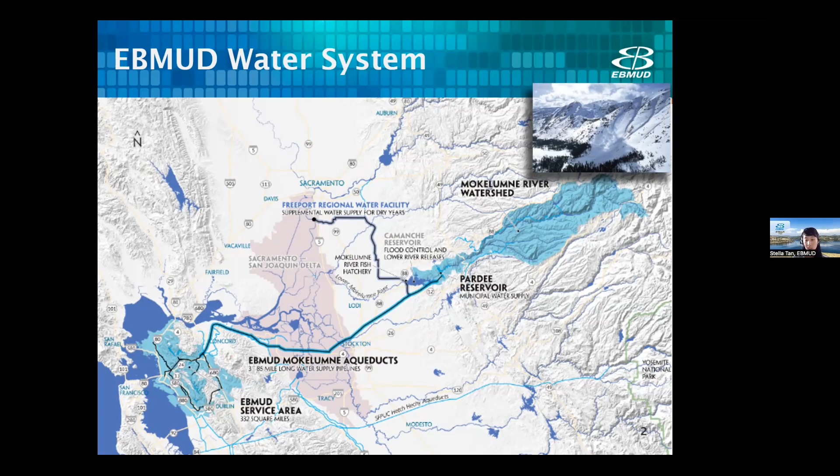The water is stored in the Pardee Reservoir before it travels 85 miles through our pipelines to the EBMUD service area. Our service area has 1.4 million customers in 29 cities in Alameda and Contra Costa counties. We have 6 water treatment plants, and water is distributed through our many reservoirs and pumping plants to our customers through 4,200 miles of pipeline.

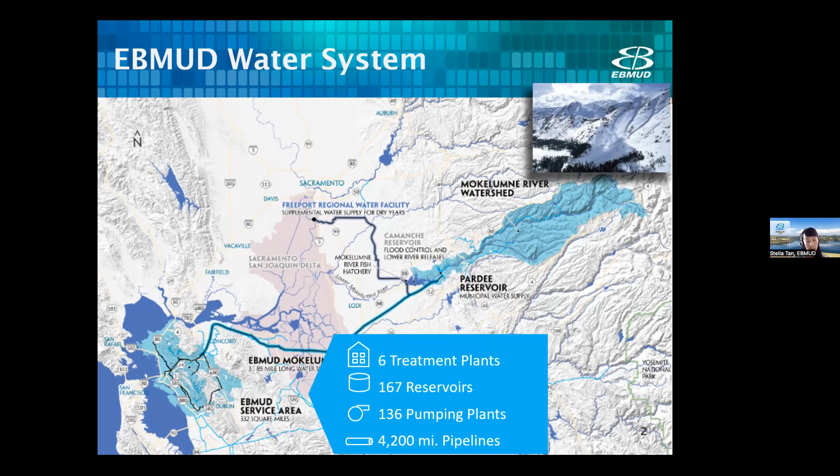This project will take place in one of our 6 water treatment plants, at the Sobrante Water Treatment Plant, as you're all aware. And we plan to increase the Sobrante Water Treatment Plant capacity by constructing new facilities in 2 phases.

The purpose of tonight's meeting is to introduce you to the project, including preliminary site plans and conceptual visual simulations, which we've revised since the March public meeting. We would also like to receive your feedback and concerns.

To provide some context for the project schedule, we're currently in the planning stage, where we're developing the conceptual design and executing the environmental review and public outreach. After planning is completed, we'll begin phase 1 design, which includes the design of the phase 1 structures and completion of agency permitting. Phase 1 construction then follows, where we'll construct those phase 1 structures. Next is phase 2 design, which includes the design of those phase 2 structures, as well as pipeline, and completion of agency permitting. And the last stage is phase 2 construction, where we construct that phase 2 pipeline and structures.

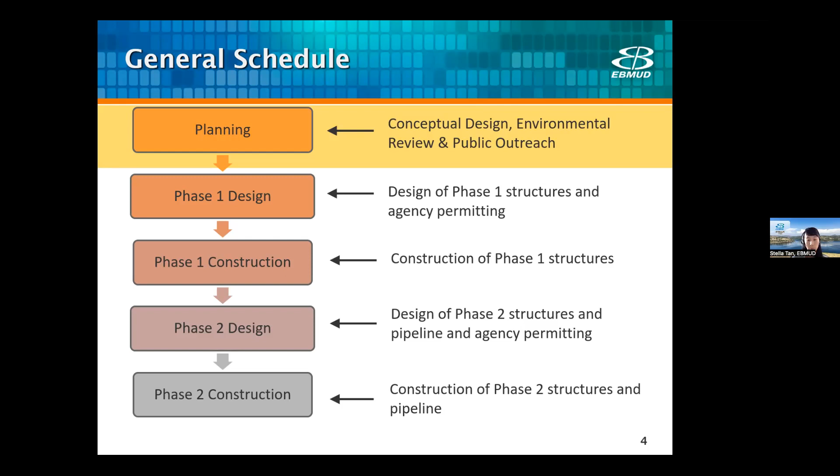Tonight's agenda includes an introduction of the project team, the project location, the purpose, need, and description, and the conceptual visual simulations. I'll also provide an overview of the environmental review process and schedule, the next steps, and then there'll be an opportunity for questions and comments. I would like to request that everyone save their questions for the end of the presentation in case any of the information provided answers a question you may have.

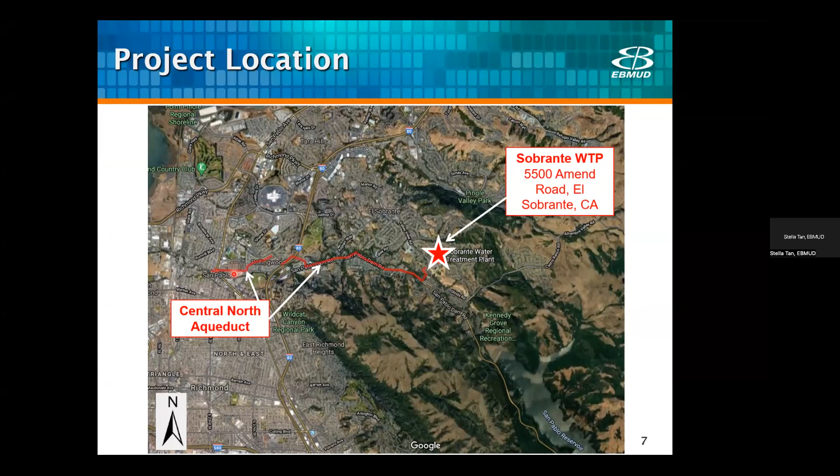This project has two locations, which includes the new structures at the Sobrante Water Treatment Plant and the new pipeline as shown here. Those new structures will be constructed at the Sobrante Water Treatment Plant, which is located east of Highway 80, north of San Pablo Dam Road and northwest of San Pablo Reservoir, which supplies this water treatment plant. The pipeline is called the Central North Aqueduct Pipeline, and it is required to convey the increased water treatment plant capacity as part of phase 2. The pipeline is located in the communities of El Sobrante and Rollingwood and in the cities of Richmond and San Pablo.

The project purpose and need is to meet existing and future water demands, to maintain water quality and reduce disinfectant byproducts, to support drought operations, and to provide treatment capacity for changing untreated water quality or planned untreated water aqueduct outages.

The scope of the project includes constructing new structures to increase reliable capacity of the Sobrante water treatment plant, and will do so in two phases. Phase 1 in the near term is 60 million gallons per day, and phase 2 in the long term is 80 million gallons per day. After phase 1 is completed, we'll demolish the structures at the existing Sobrante water treatment plant, and in phase 2, we'll construct the Central North Aqueduct pipeline, which is required to convey that phase 2 treatment capacity.

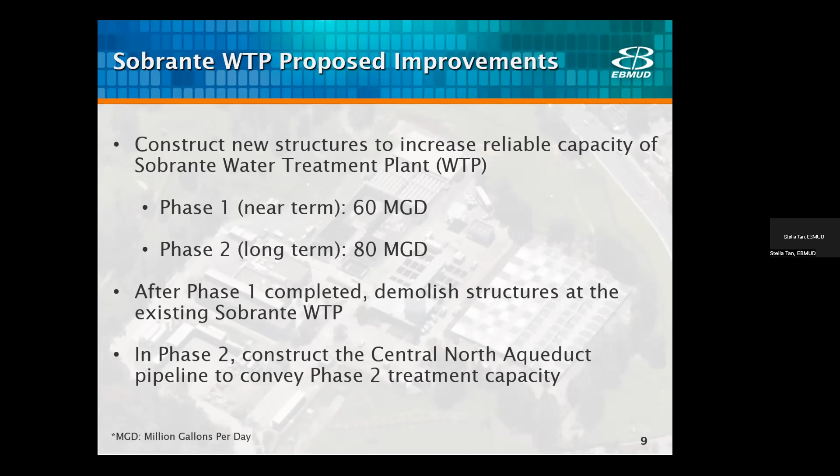Let me unmute myself. Thank you. The phase 1 construction begins in 2026 and ends in 2030 under current estimates, and the demolition work will be completed at the tail end of those improvements.

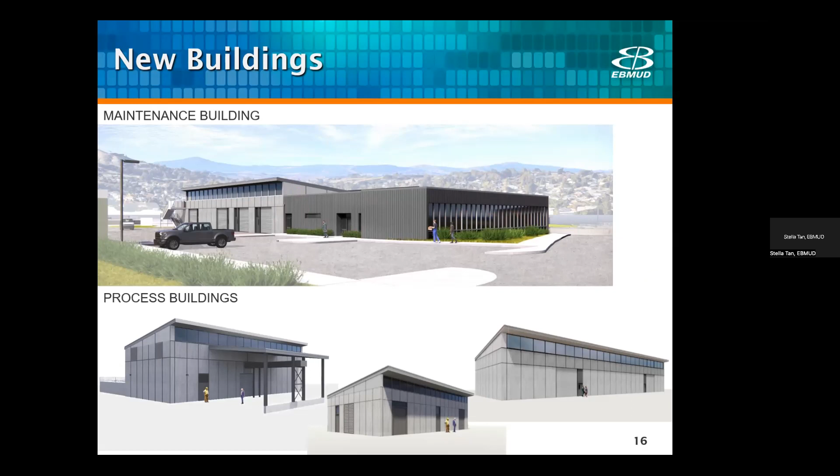Because the Sobrante water treatment plant has sloping hillsides with mature landscaping along the southwest side along Valley View Road, on the northeast side along Amend Road, and below Fascination Circle, most of the site views are minimally changed as a result of the project. We took this into consideration as we selected our key site views.

Our key site views include the first view at the entry road, the second view at Heavenly Ridge Lane and Amend Road, both looking south. View 3 is on Amend Road on the west side, looking southeast. And view 4 is Christopher Court, looking east at the water treatment plant.

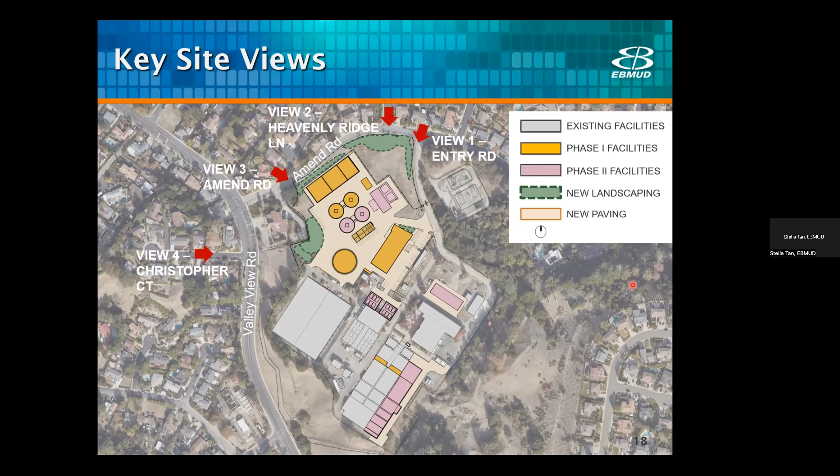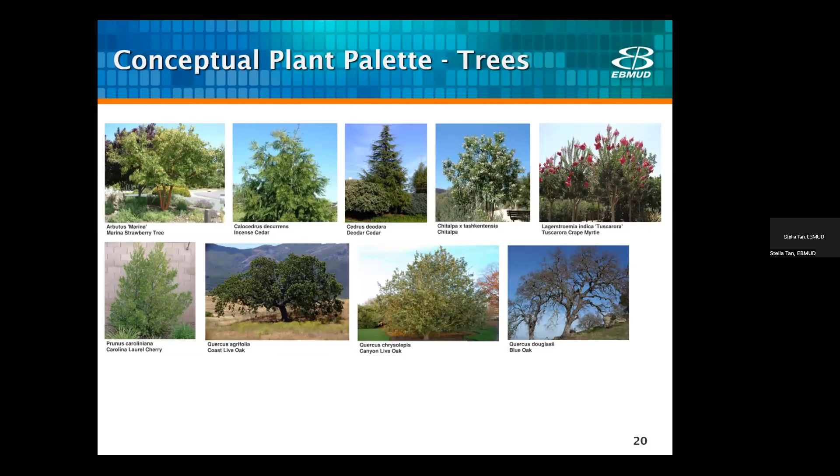To provide screening for the project improvements while blending in with the neighborhood landscaping, the project landscape architect created a conceptual plant palette, which includes the trees shown here. There are a variety of native and adapted trees, including conifers, some flowering, and some deciduous trees, or those that lose their leaves in winter, and those will provide some seasonal change.

All of the plants selected are adapted to our summer-dry climate, and they all have low water use to provide that value to our local ecosystem.

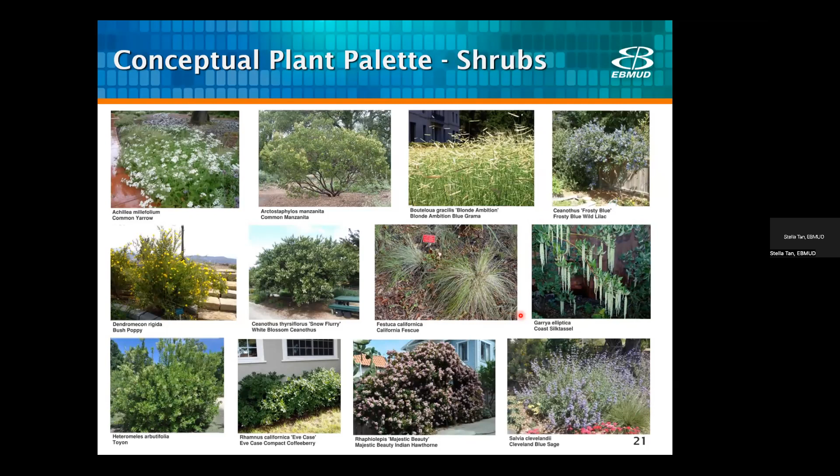During our public meeting in March, we received requests for improved aesthetics along Amend Road. We were able to obtain approval from our security team to use an alternate security fence and also some low landscaping along Amend Road. This exterior fence no longer has barbed wire, and it's more of a mesh-type fence instead of chain link, to soften the look. In addition, we've shifted the fence slightly back to add landscaping in front of it. You'll see those plantings in the following images.

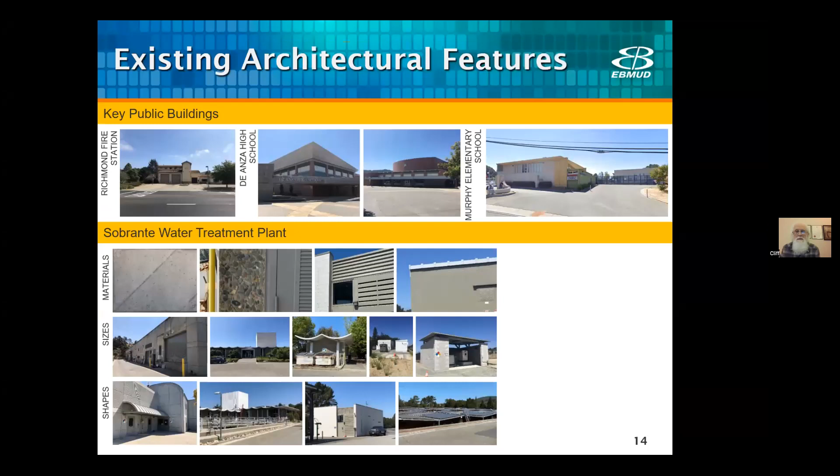Perhaps you could scroll down. Let's go down one. Stop. Back. Okay, here we are. If you look on the left-hand side, you will see the fire station, and I was involved in the design review committee for that structure.

Initially, the architect proposed a building like one of the other three on the right, which, by the way, are nowhere near this new facility you're proposing, and don't in any way reflect the architectural style of the residential area in which we live. That point was made to the architect for the city of Richmond, and he took it with both hands and came back with a new design.

Now, if you look at the photograph taken slap on the front, it looks like a semi-industrial building, somewhat residentialized. But in actuality, as you pass the structure and see it from the roads—most of us drive cars these days—it actually fits in very, very well. It has the same kind of roof and the same kind of walls.

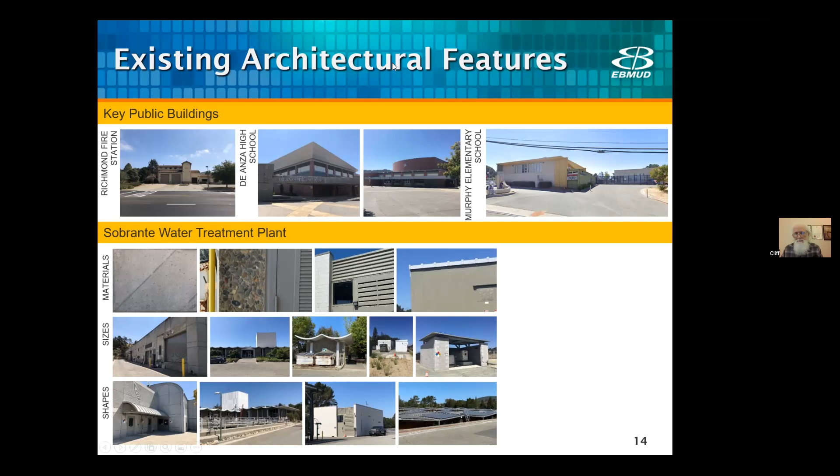And then off-site, when we get to San Pablo Dam Road, you're putting a 54-inch main right the way through the middle of El Sobrante. El Sobrante is probably not the most fashionable place in Contra Costa County, but I've seen these kinds of projects completely destroy what exists of the commercial operation within the neighborhood. So you're going straight the way down from, I'm thinking pretty much from Castro Ranch Road all the way into San Pablo by Raley's. Not quite that far, I guess. But the actual work that will be taking place is going to take a considerable amount of time.

And even though the 54-inch pipes won't be visible after all the work has been carried out, the trenches have been dug, all the support work and everything necessary is provided, the pipes are lowered into place, and then everything's covered up. In that construction period, of which I have some personal experience, it's going to be a long time, and the businesses on each side of the road are going to suffer accordingly. So I'd like EBMUD to address that whole issue. And with that, thank you very much.

Thank you, Cliff. It's true. Anybody would like to respond to Cliff's comments? Sorry, I realized I was muted. Thanks for your comments, Cliff. We will note your comment on the key buildings.

And regarding the screening of all or part of the facilities, we had mentioned this at our last meeting, if you were able to attend. Primarily, we aren't able to fully screen all of our facilities because of security concerns. We're really balancing our ability to maintain some security visibility with screening all of the structures. So generally, we don't aim to screen them all, but we do try to make it a more attractive building.

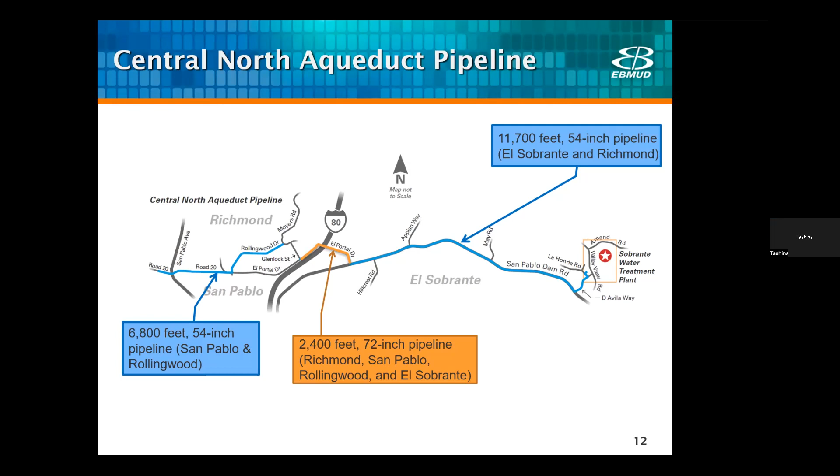On the opposite side of Amend, isn't that the one on the corner of Amend and Castro Ranch? Isn't that also an EBMUD thing? I think maybe you're referring to these facilities over here, because whatever that is, it has a nice wood fence. Castro Ranch, yes, that is also on the very opposite end of Amend property, on the corner. It has a very nice fence. I wonder if it's one of our reservoirs and pumping plant facilities, which would have different security requirements.

I'll note it and see what type of fence is used there, in case it's something that could be an option for a water treatment plant. But we do have higher security requirements for a water treatment plant versus our pumping plants or reservoirs. Okay, thank you for looking into that, because they just redid that fence not long ago, and it's a beautiful wood fence that fits better into the neighborhood. Thank you.

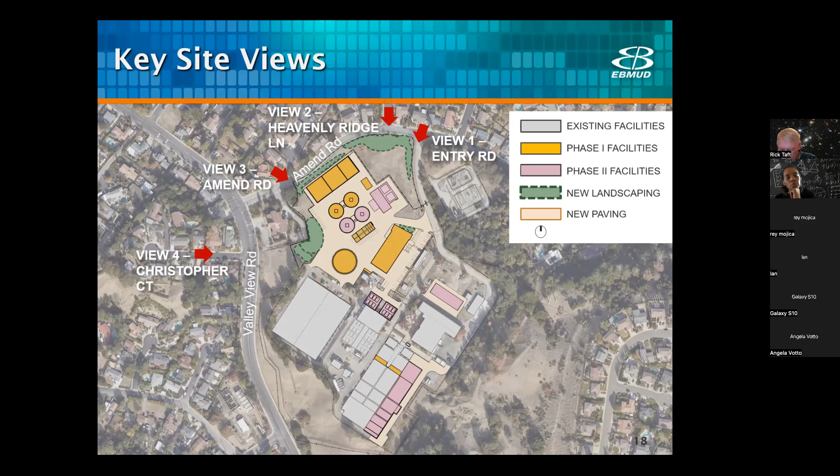Just to be clear, this is for drinking water, not a wastewater facility. So somebody said something about crap—this is drinking water treatment. Well, sorry, I thought it was wastewater. So it services all of those cities from Crockett to Richmond. That's correct. And my final question is, is there a current pipeline now?

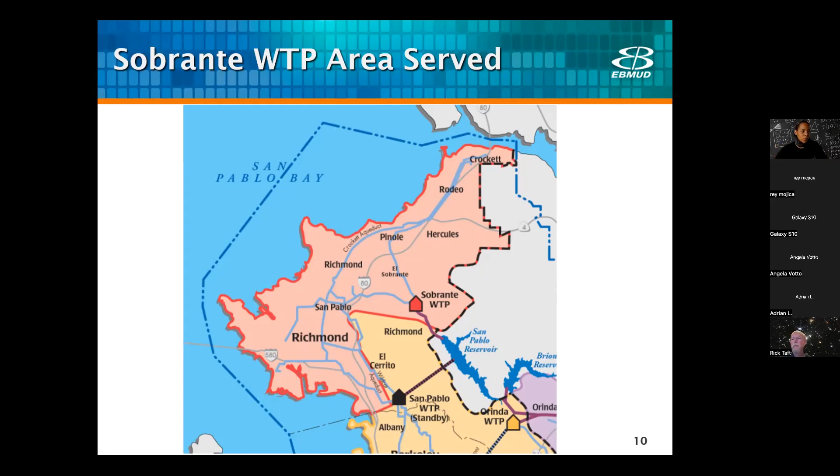Yeah, a couple of things. Someone asked earlier about whether it is water or wastewater. Some of you may know, and some may not, that West County Wastewater actually partners with EBMUD to handle the wastewater treatment for all of our neighborhood here, and for much of this area you see on the screen, up through Pinole, but not past a portion of Pinole, not Hercules or Rodeo or Crockett.

So that concern is not, or shouldn't be, what we're discussing here tonight. I actually live at the top, right off of Heavenly Ridge, at the top of this area that we're discussing tonight. My concerns are the same as much of you, because I am a neighbor here, and we've lived in this house since 2000. I think much of what's been discussed, especially in terms of aesthetics and making sure the facilities suit our neighborhood, is important.

I think what's most important to me, as a scientist—I'm a cell and molecular biologist and biochemist by training—is making sure that if we're going to see these projects through, yes, we want a nice building, we want it to look good, we want it to fit into the neighborhood. But most importantly, to spend this amount of public money, because EBMUD is spending public money, we need the most technologically advanced and the best type of treatment center that we can get. So I want those kinds of questions answered.

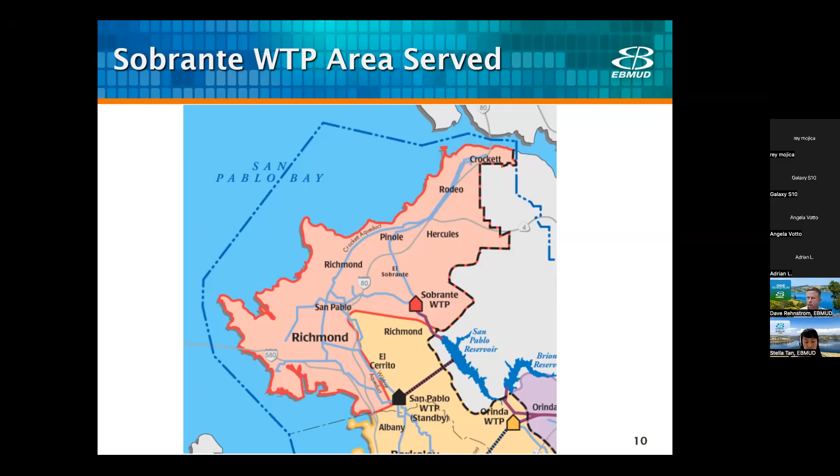Yeah, thank you for your comments, Cheryl. I will speak to that, and maybe the image helps a little bit. I would say one of the biggest improvements we're making at this water treatment plant is that it currently doesn't have a chlorine contact basin, which allows us to disinfect in the way that is most effective and efficient under current water treatment standards.

So that's a big improvement for us. We're also considering drought. The new facilities allow us to further reclaim water that would have been wasted and sent to the sewer. So that's a really important part of this upgrade as well.

And in terms of what companies will be doing the design, we haven't identified that yet because we're currently in the planning phases. But our EBMUD engineers are definitely looking out for long-term reliability as well as effective treatment processes internally, because we feel like these facilities are going to be owned and managed by us, and it's a huge priority that we're able to operate and maintain them very effectively. So your concerns are definitely going to be addressed.

This upgrade is going to be a wonderful improvement for this water treatment plant. So thank you for your comments. Thank you very much. Ray, please unmute yourself and ask your question or comment.

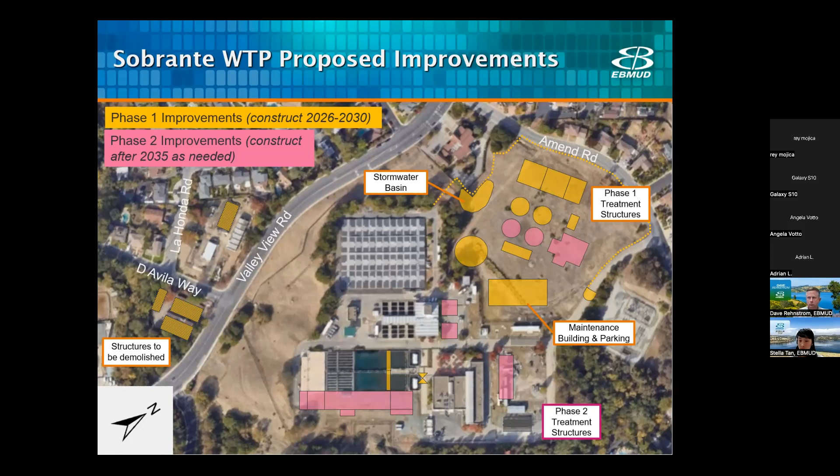And secondly, on Amend Road, there's only one sidewalk where the resident side is. My question is, is there a possibility of extending the existing 3-foot concrete sidewalk from the firehouse all the way up to Amend Road, so people can use that? As far as I know, people walk down from Amend Road from the top of the hill, or ride down their bikes. Is there any consideration for adding a sidewalk from the firehouse on the EBMUD side all the way up to your entrance?

I was wondering if there's a possibility of looking into that. And as far as the structures along Amend Road, I guess they won't be too high, they're not buildings, they're facility structures. Can those move down a little bit towards the center of the building, just to gain more room for the sidewalk, as well as move down the fence and add more landscaping there, just to cover up the facilities? I know it's landscaping, just adding a little more, to probably keep people comfortable in that area, especially for the people living across the street.

That's the first comment I have. So just wondering what your comments would be.

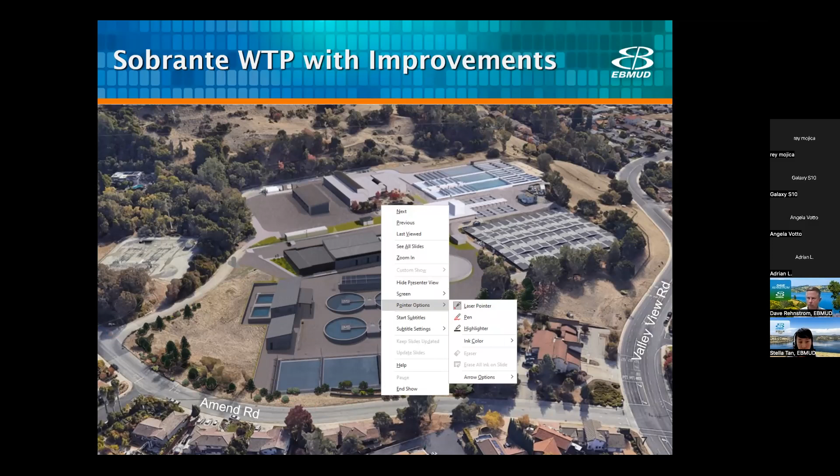Hello, my name's John Vanny. My question is, can any of the facilities be put underground, especially the equalization basins out front?

Over at the SFPUC, they have an underground wastewater plant. I think it handles 150 MGD in wet weather, that you wouldn't even know there was a wastewater plant there. Also, you're talking about soils removal or excavation. If some of that soil can be saved to create a berm to kind of hide the plant from the public, that's one thing I had.

The work going along San Pablo Dam Road, have you guys talked to other utilities to coordinate any type of work out there, so everything's done at one time instead of piecemeal?

And also the lighting, would the lighting be the low Kelvin lighting, like 2700 warm white, as opposed to a brighter white thing? And is the facility operational 24/7?

Is there personnel on site 24/7? You were talking about security. Just curious if it's an unmanned facility. I can see why you're concerned about seeing through, but if there's someone on site, you have personnel. That's it.